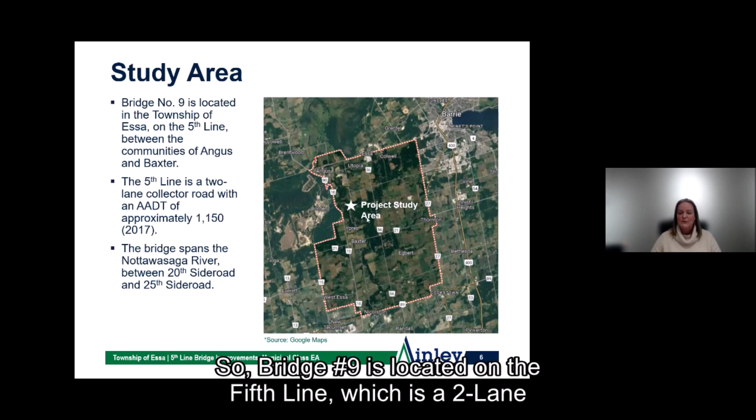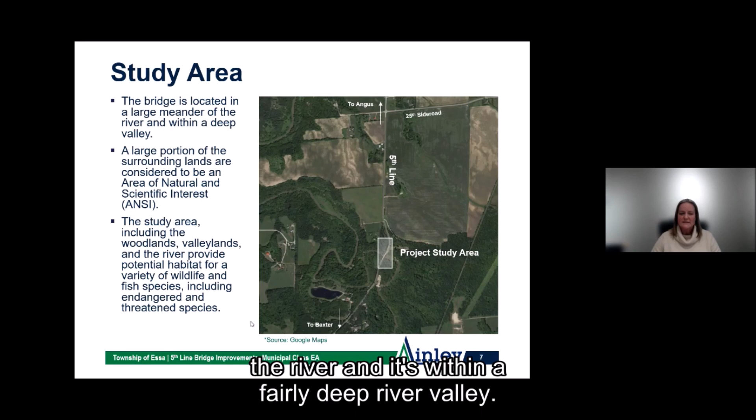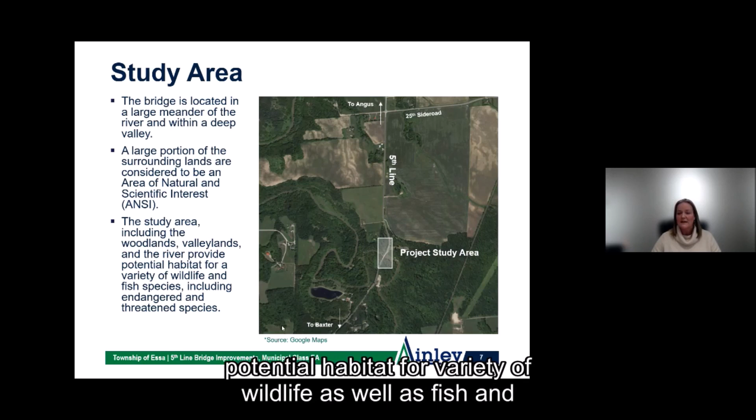Bridge number 9 is located on the 5th line, which is a 2-lane collector road. The bridge spans the Nottawasaga River between the 20th and 25th side roads. The bridge itself is located where there's a large meander of the river, and it's within a fairly deep river valley. Because of this, a large portion of the surrounding lands are considered to be an area of natural and scientific interest, and the woodlands and valley lands also support potential habitat for a variety of wildlife, as well as fish and aquatic species.

The existing structure is approximately 70 years old, and it consists of 2 spans of concrete T-beams that are supported on concrete abutments and a central pier. It also has a concrete deck and a concrete wearing surface.

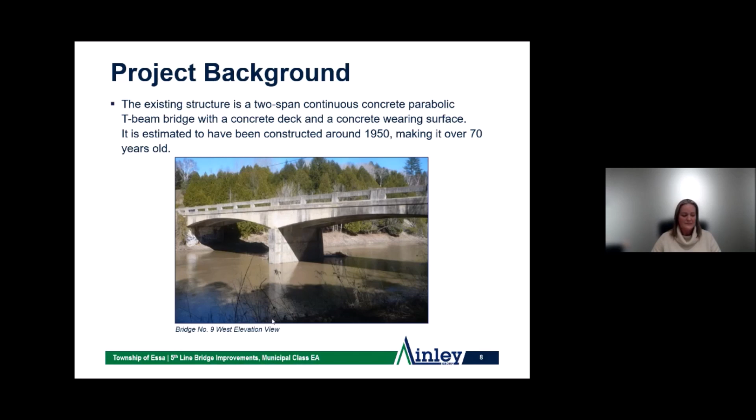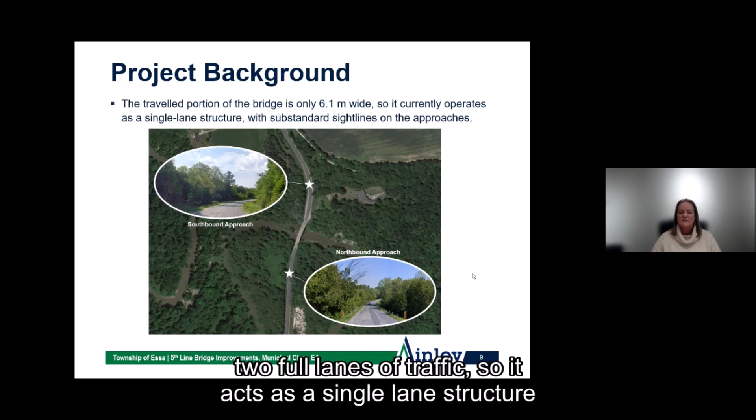The traveled portion, or the width of the traveled portion of the road that is across the structure, is only 6.1 meters wide. So that means that it's not quite wide enough to support 2 full lanes of traffic, so it acts as a single lane structure at this point in time. The sight lines on either approach are substandard, which means that it can be sometimes difficult to see around the curves as you approach the structure.

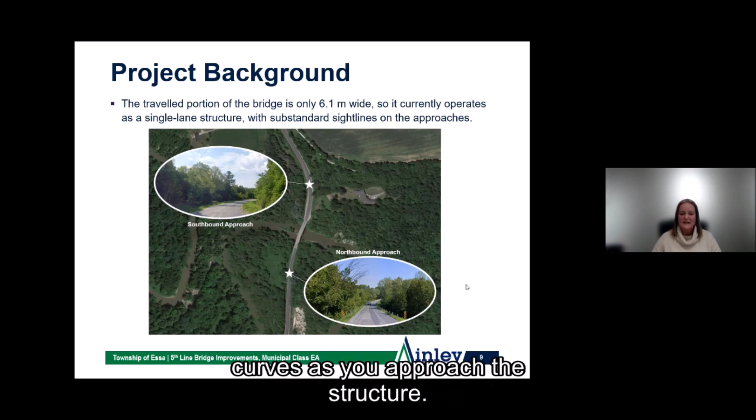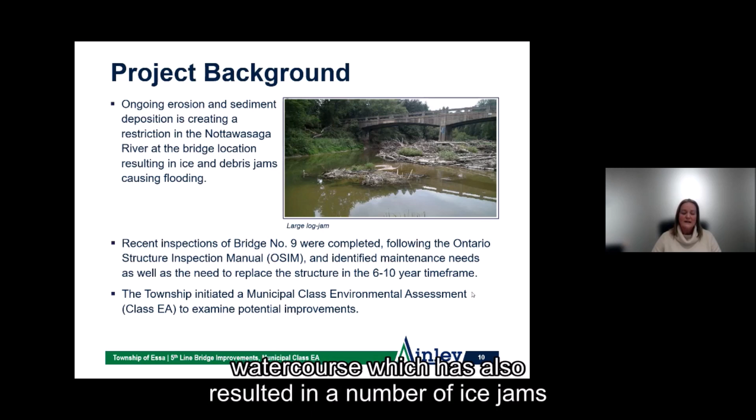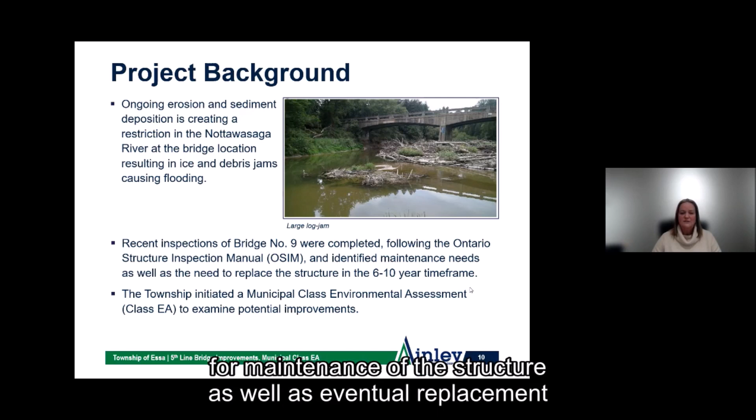There have been issues with ongoing erosion within the river valley and deposition of sediment near that central pier within the existing riverbed. This has created an island or a restriction within the watercourse, which has also resulted in a number of ice jams and log jams in recent years, as shown in the picture on this slide. Recent inspections of the bridge have also identified the need for maintenance of the structure, as well as eventual replacement of the structure within about a 6 to 10 year timeframe.

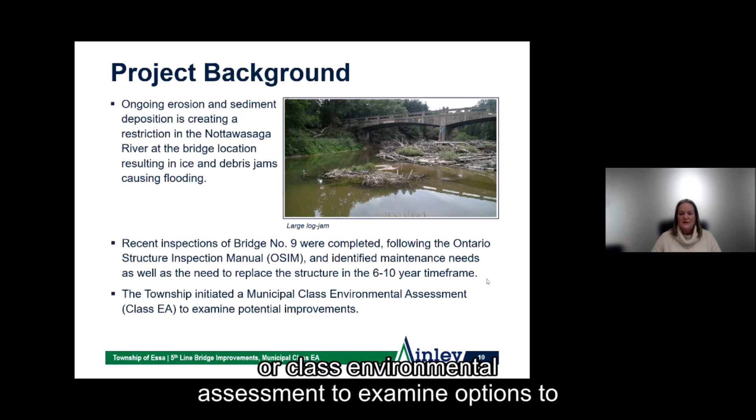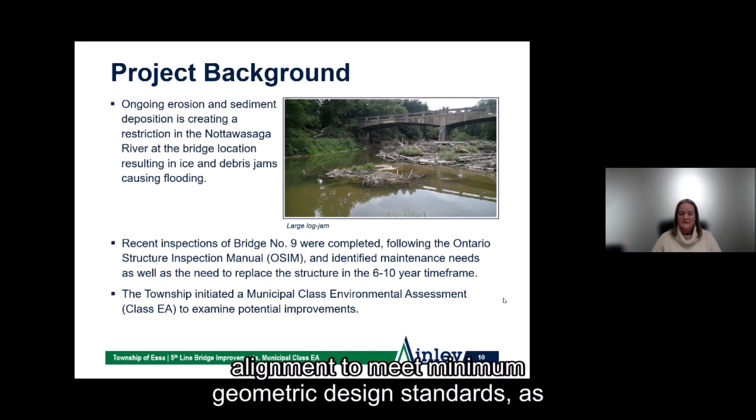As a result, the township has initiated a municipal Class EA, or Class Environmental Assessment, to examine options to address these deficiencies. And that includes accommodating a full 2 lanes of vehicular traffic, improving the horizontal and vertical alignment to meet minimum geometric design standards, as well as to address these ongoing issues related to erosion, sediment deposition, as well as these ice and debris jams that are occurring in the river.

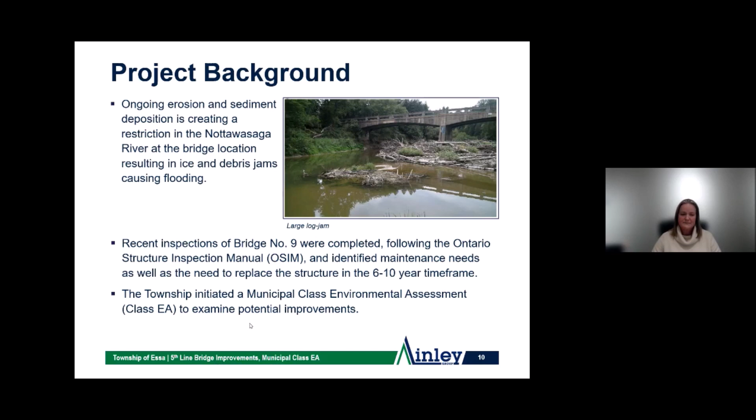In accordance with the Environmental Assessment Act, a municipality is required to conduct a municipal class environmental assessment before certain types of infrastructure projects, such as this one, can proceed to design and construction. The purpose of this is to ensure that projects consider the environment, and it's important to note that the environment is more broadly defined than one might think.

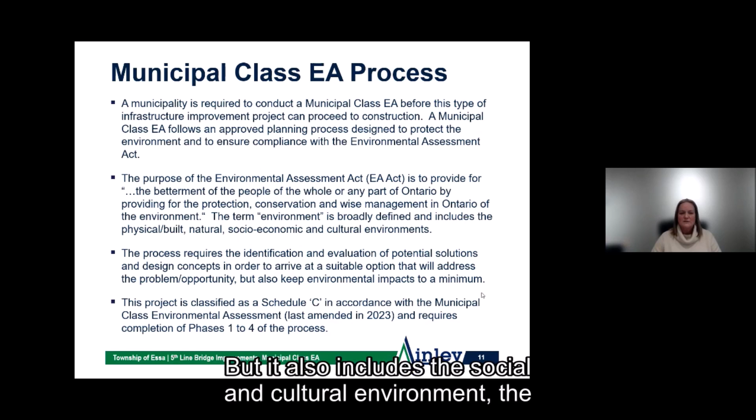So the word environment includes the natural environment, which is what we would typically consider to be plants, animals, groundwater, surface water. But it also includes the social and cultural environment, the physical or built environment, as well as the economic environment. All of these environments influence the people in the communities within the municipality, so all of these environments must be considered.

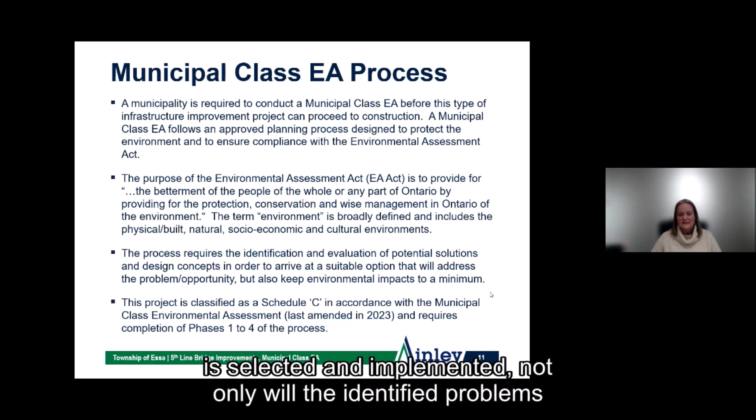The Class EA process requires the evaluation of various potential solutions and design concepts, so that once one is selected and implemented, not only will the identified problems be addressed, but the purpose is that the impacts to the various environments can also be minimized or mitigated.

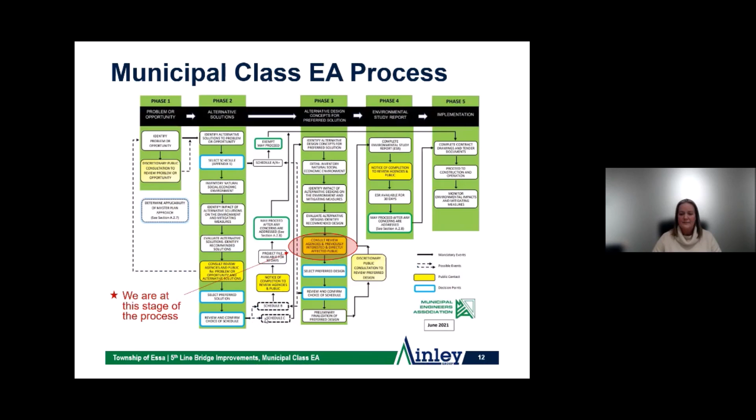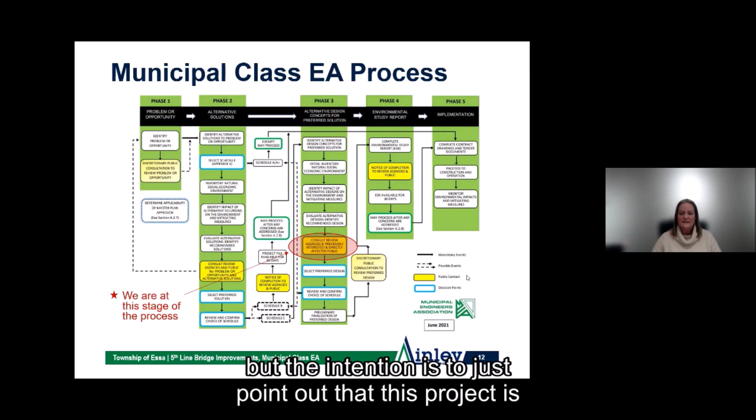This figure just provides a general overview of the Class EA process. It might be a little bit difficult to see on your screen, but the intention is to just point out that this project is following a Schedule C class environmental assessment process. And that means we have to complete phases 1 through 4 of this process.

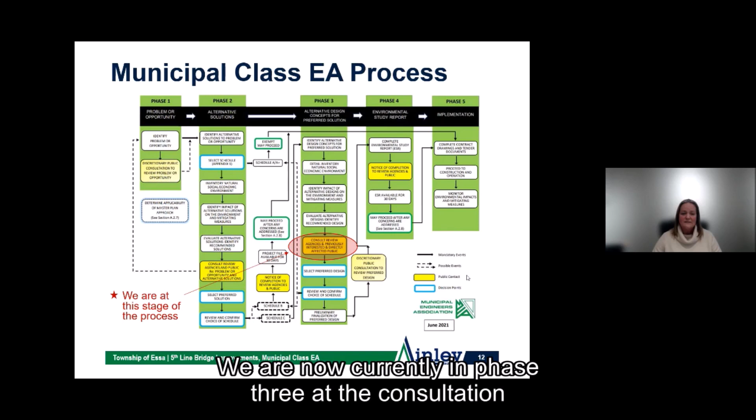You may recall when we did PIC number 1, we were back in phase 2. We are now currently in phase 3 at the consultation phase. So we are engaging and consulting again with various agencies, First Nations, stakeholders, as well as the public to obtain feedback on the work that has been completed to date.

So as I mentioned, there was a PIC number 1 previously held during phase 2 of the process, and that was back in late 2021. At that time, we had considered several alternative solutions to address the problem, and those were more broad solutions and included option 1, which was do nothing.

And that option really only gets considered because it provides a baseline upon which to assess the other alternative solutions. But because it doesn't really address the problem statement that has been developed or the reason why the Class EA was initiated, it's not typically considered to be a viable solution.

At that point in time, we also considered the alternative of rehabilitating the existing bridge structure, replacing it in its current location to accommodate the 2 lanes of traffic, and replacing the bridge but on a new alignment further to the west. And after the evaluation was completed in phase 2, we held the PIC and had consultation with various stakeholders. Option 3, the option of replacing the bridge structure in its current location, was selected as the preferred solution.

So since then, the team has undertaken additional studies and we've completed additional design work to develop these alternative design concepts for how this preferred solution could be implemented. So in doing so, the first thing we had to look at was the horizontal alignment. And in order to keep the structure generally within the same location as it currently is, there was really only one option for a horizontal alignment. So all of the concepts that you're going to see moving forward will have that one consistent horizontal alignment.

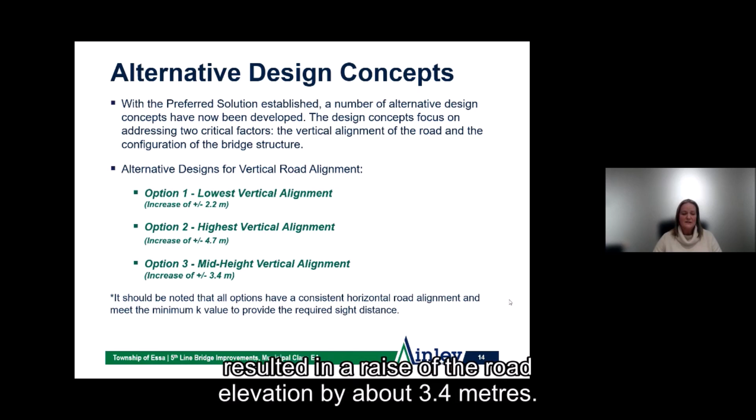The second option we considered, we called the highest vertical alignment option. So conversely, we looked at an option that would raise the elevation of the road fairly significantly to try to smooth out or reduce the valley that you have to traverse through this area. Under this option, it would require a grade raise of about 4.7 meters. And then the last option, or option 3 that we looked at, was essentially the average between the two. So we called it a mid-height vertical alignment option, resulting in a raise of the road elevation by about 3.4 meters.

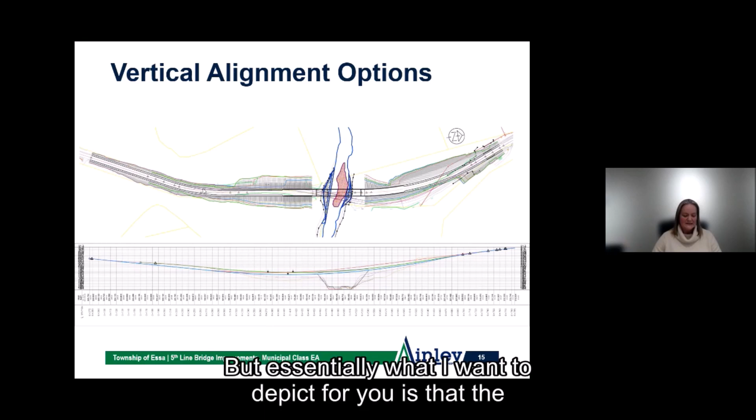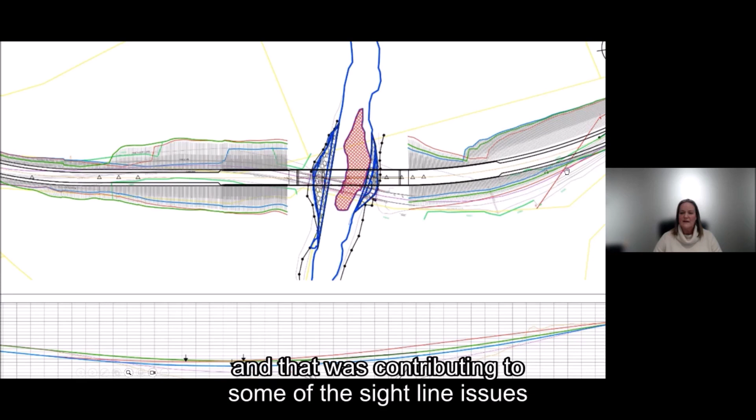The original road alignment, if you can kind of see it here, had quite an S-bend, and that was contributing to some of the sightline issues out there. The horizontal alignment that we selected, as I mentioned earlier, essentially smooths that alignment out and squares up the bridge to be more in line with the approaches on either side.

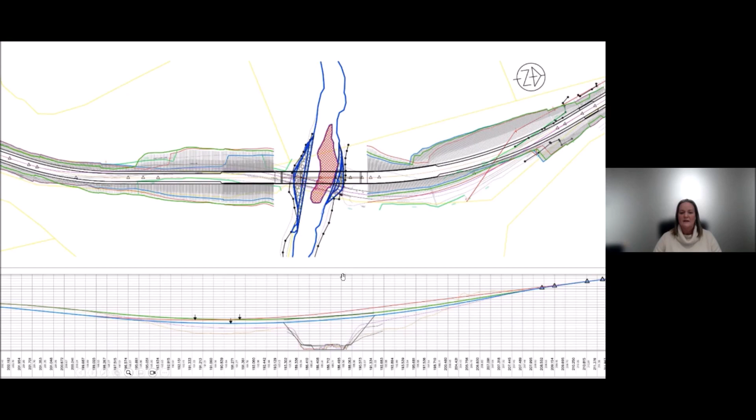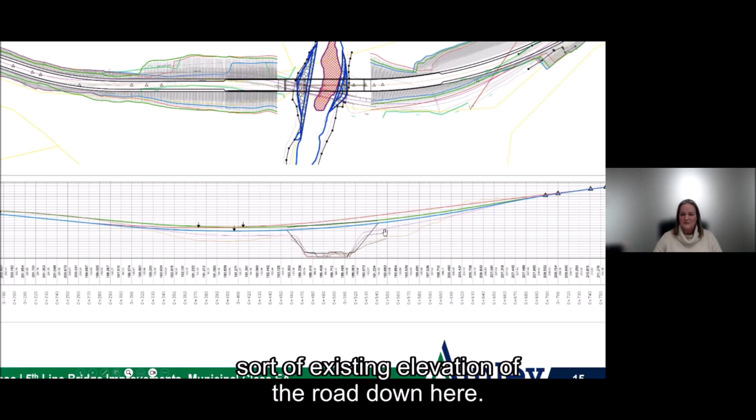Down here you can see the three vertical alignment options. I apologize, it may be hard to see, but we have the existing elevation of the road down here, and blue represents the lowest vertical alignment for option 1. Red represents the highest vertical alignment option, option 2, with green being the option in the middle.

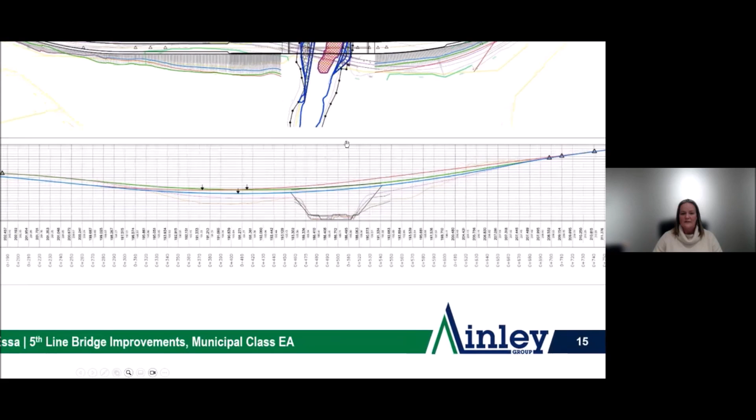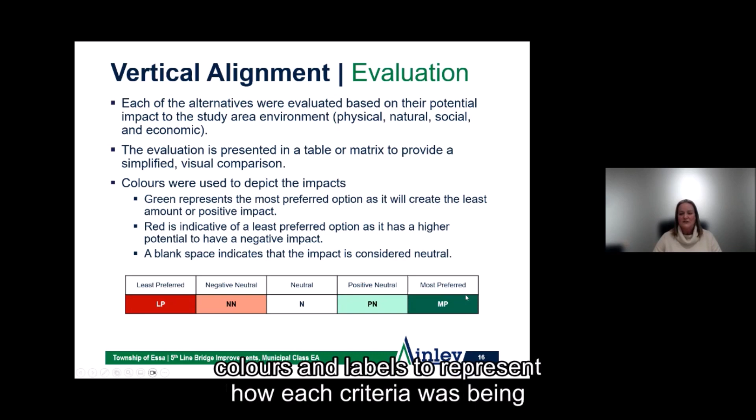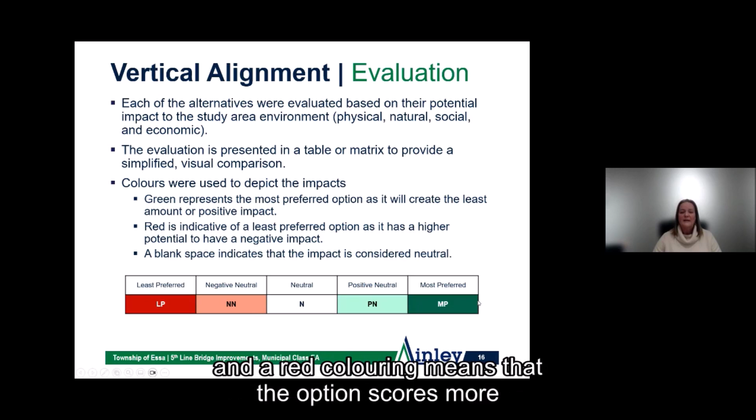Once we established the vertical alignment options, the team has to go through an evaluation process to evaluate the options based on their potential impact to the various environments. We decided to use an evaluation matrix with colors and labels to represent how each criteria was being scored. A green coloring means the option scores well or is more preferred for that criteria. A red coloring means the option scores more negatively. If an option is scored white or left blank, it essentially means the score is neutral.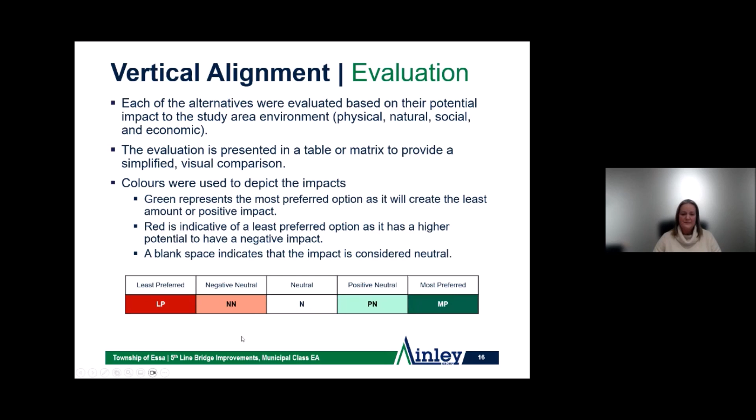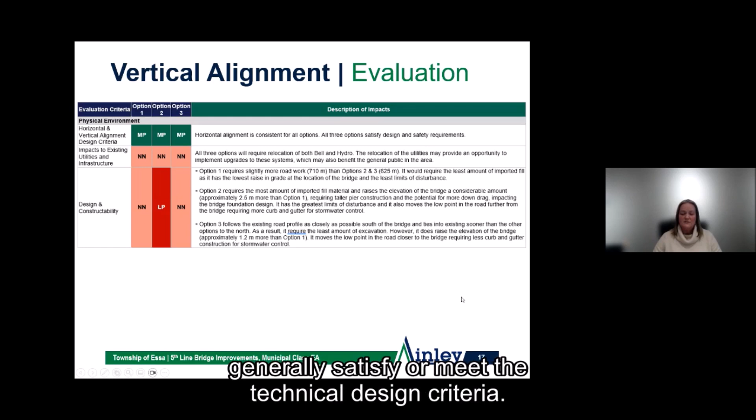For the three vertical alignment options, we started with an evaluation of the physical or built environment. Keeping in mind that option 1 is the lowest alignment option, option 2 is the highest, and option 3 is the middle: for the physical or built environment, all three options generally satisfy the technical design criteria, so they all score well in that category. Similarly, all three options will have impacts to existing utilities, so they all scored somewhat negatively.

However, when it comes to design and constructability, options 1 and 3 score better than option 2, mainly because option 2 has the largest raise in road elevation. It will require the largest amount of imported fill, the largest limits of disturbance, and may present additional potential geotechnical challenges due to the height.

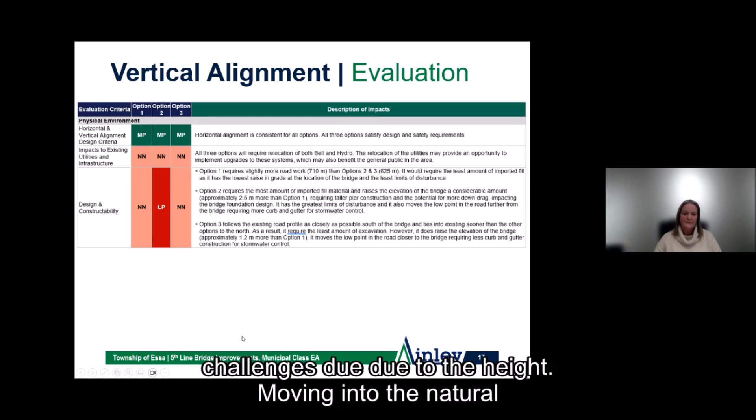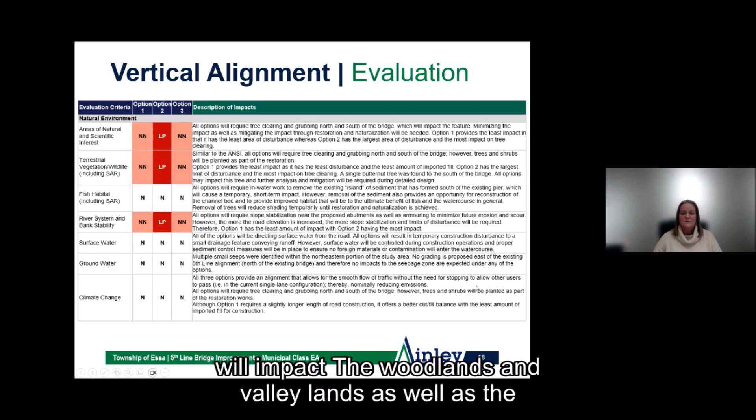Moving into the natural environment, all options will require tree removal to the north and south of the bridge, which will impact the woodlands and valley lands, as well as potential wildlife habitat in that area. Minimizing tree cutting is certainly preferred, which is why options 1 and 3 score slightly better than option 2, because they will have less limit of disturbance.

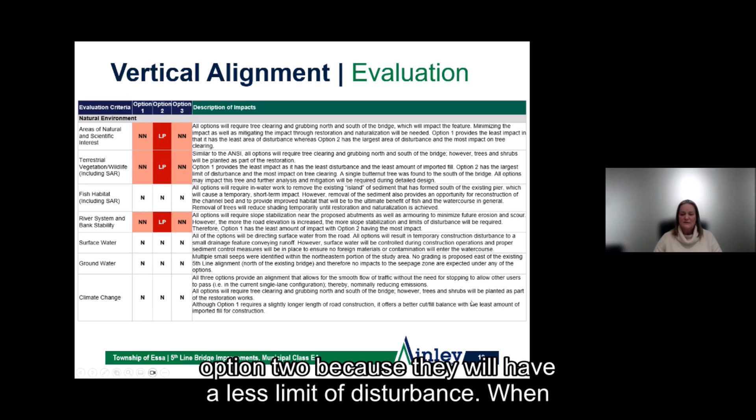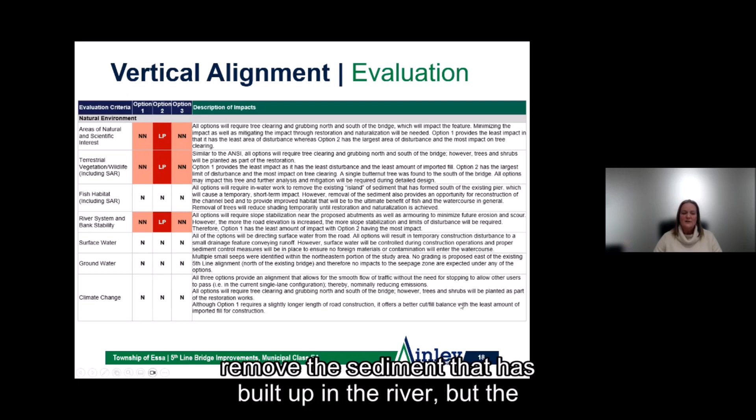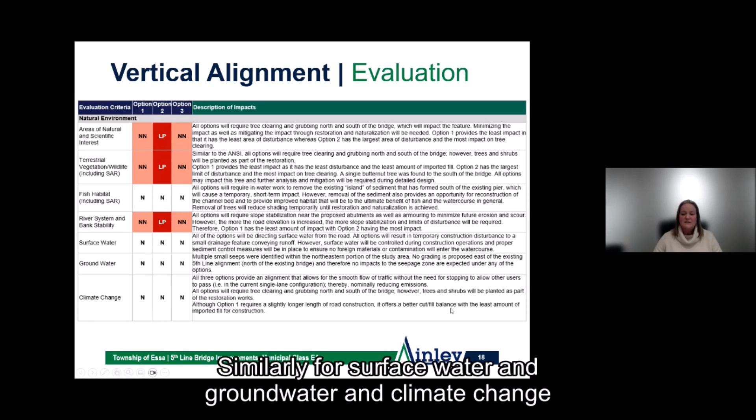When it comes to fish or aquatic habitat, all options will require some in-water work to remove sediment built up in the river, but the evaluation of vertical alignment in terms of aquatic species and habitat doesn't really come into play. Similarly, for surface water, groundwater, and climate change considerations, all of these vertical alignment options generally score about the same.

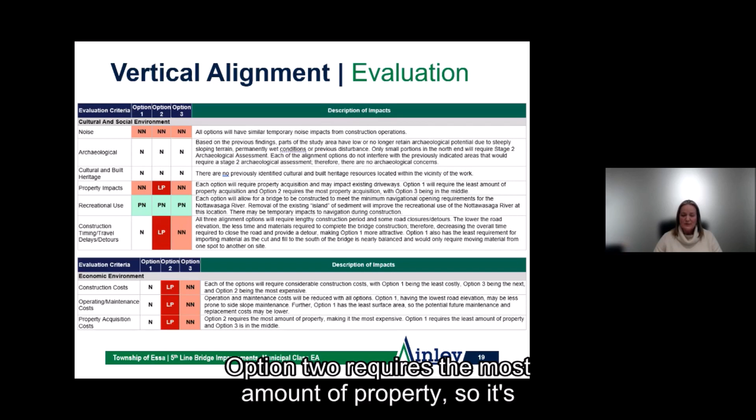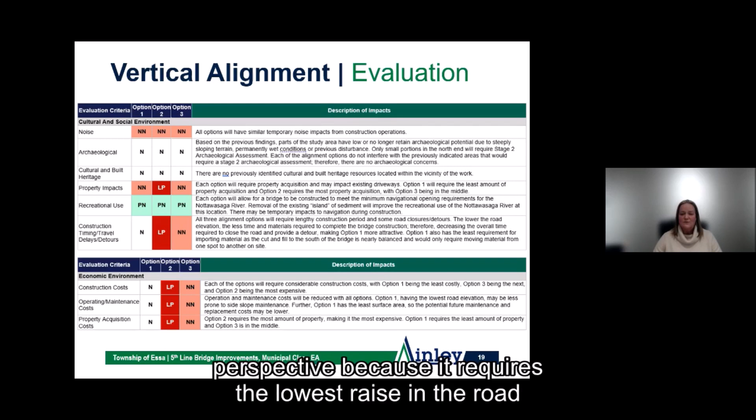For the cultural and social environment, the main difference is that option 1, requiring the least amount of property, is more preferred. Option 2 requires the most amount of property, so it's least preferred, with option 3 in the middle. Option 1 is also preferred from a construction timing perspective, because it requires the lowest raise in road elevation, it's anticipated to take slightly less time to construct.

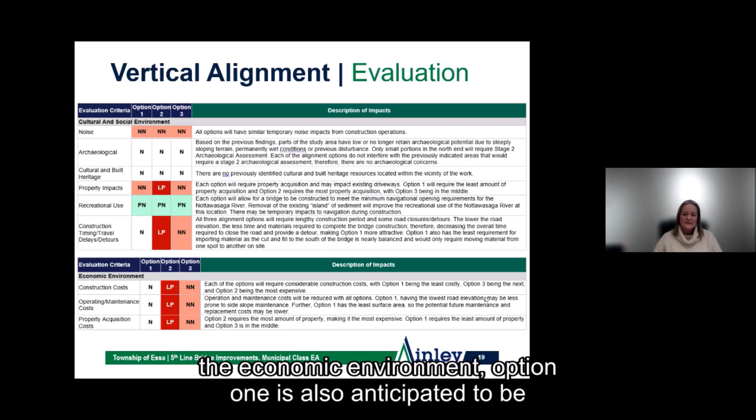In terms of the cost between the three, when we get into the economic environment, option 1 is also anticipated to be the least expensive, again with option 2 being the highest and option 3 being in the middle.

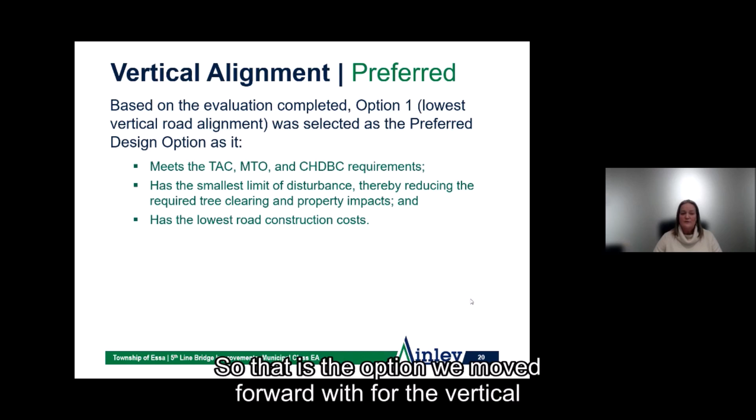Based on the evaluation completed for these 3 vertical alignment options, the team has selected option 1, the option with the lowest vertical alignment, as the preferred design option. This is because it still meets all of the technical design criteria and standards, has the smallest limit of disturbance, and the lowest road construction cost. So that is the option we moved forward with for the vertical alignment.

Now that we've had the horizontal alignment and vertical alignment evaluated and considered, we moved into alternative design concepts for the structure configuration itself. These 3 options that were developed included a single span structure, a 2-span structure, and a 3-span structure.

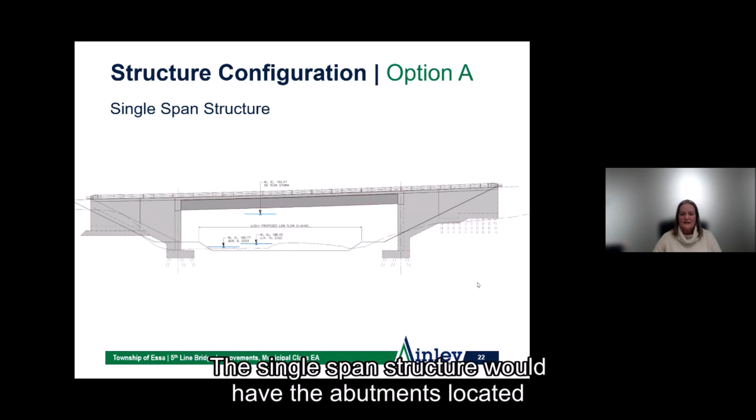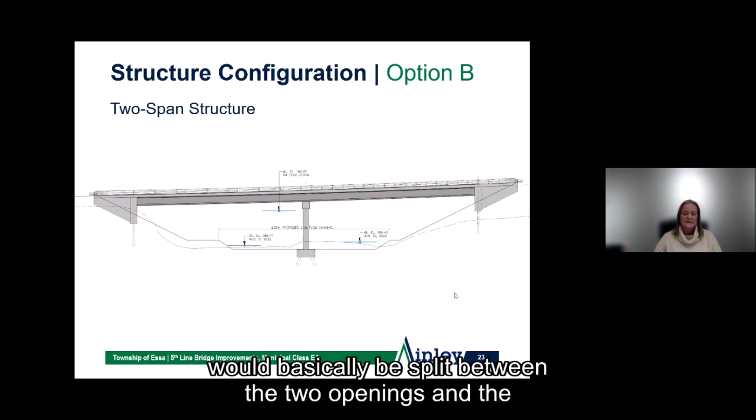As illustrated here, the single span structure would have the abutments located outside of the normal channel width, so the channel or watercourse would be conveyed through the main opening. Versus the 2-span structure option, which is essentially putting back the same configuration as what is there now, with a central pier in the riverbed splitting the water between the 2 openings, and the abutments set further back on the slope.

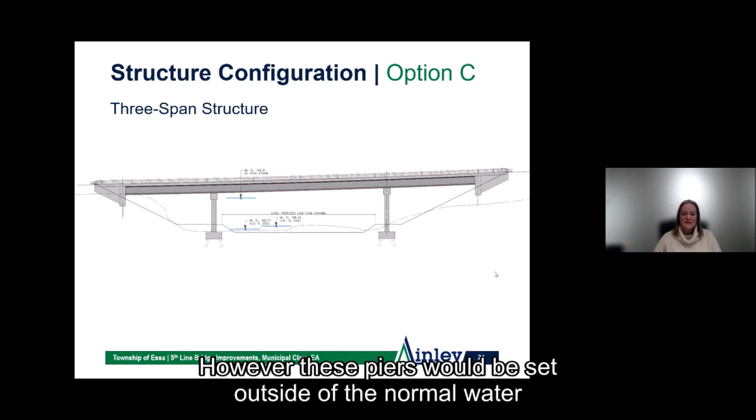Then we have option C, which would be a 3-span option with 2 piers. However, these piers would be set outside of the normal water level, so the main river channel and flow would be directed through one single middle span, and the outside spans would only be used to convey flows during larger rainfall events or spring thaws. The abutments are once again set much further back on the slope.

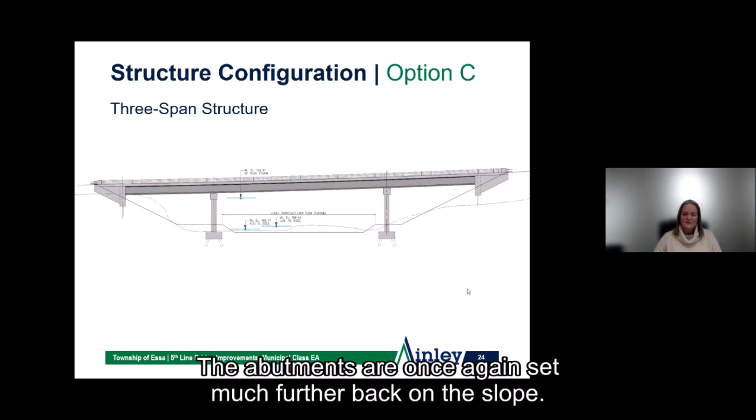Once again, with these design options, the team had to go through the same evaluation process to score each option and evaluate the various criteria and potential impacts on the environment. This time, to make it easier, any criteria that were not applicable or were considered neutral were not included in the matrix.

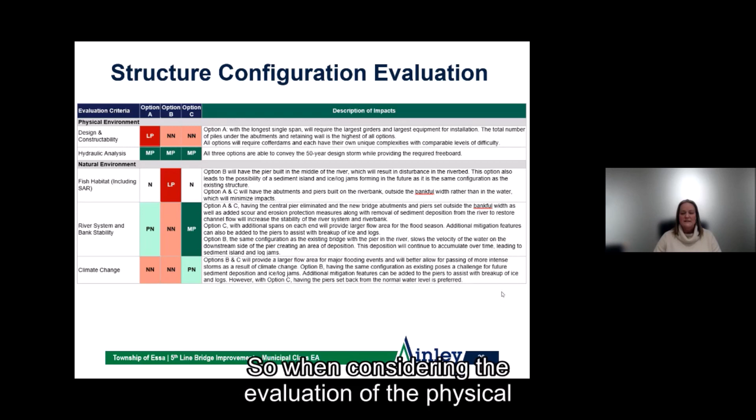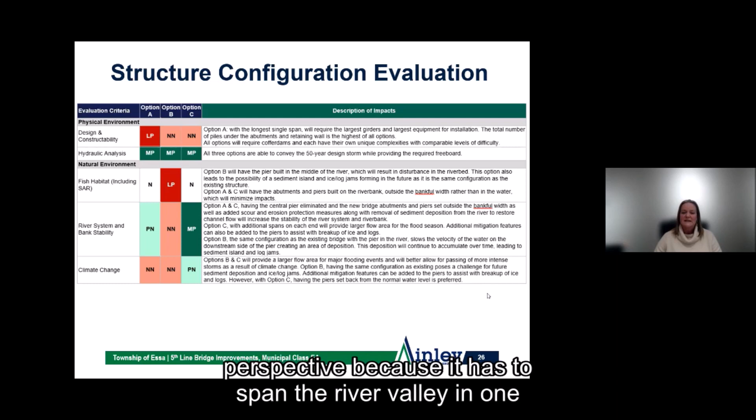When considering the evaluation of the physical environment, option A, the single span option, scored the lowest because it has to span the river valley in one length, meaning it requires the largest girders, the most piles, and the largest equipment for installation.

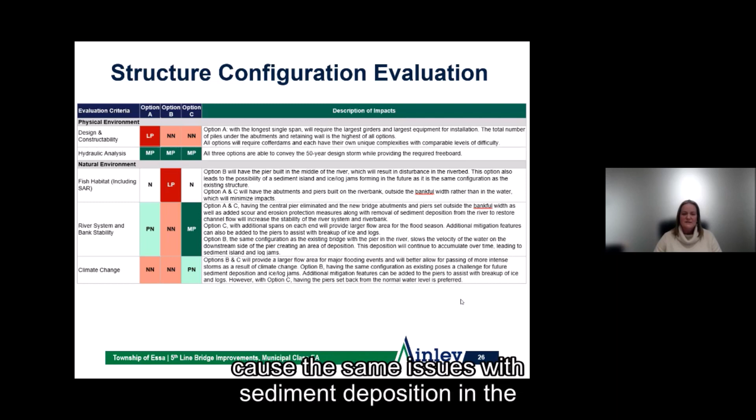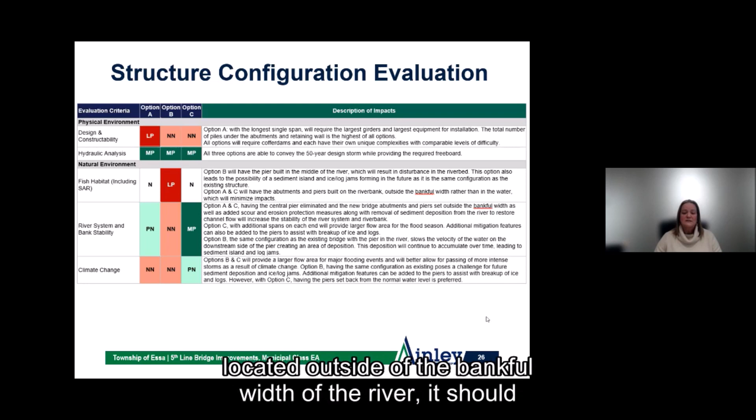From the natural environment evaluation perspective, option B, with the central pier similar to what is there now, raises concerns that it may continue to cause the same issues with sediment deposition and potential for ice and debris jams in the river, so it scored a little lower. With options A and C, since the abutments and piers are located outside of the bankful width of the river, it should minimize those impacts and provide for better river and bank stability.

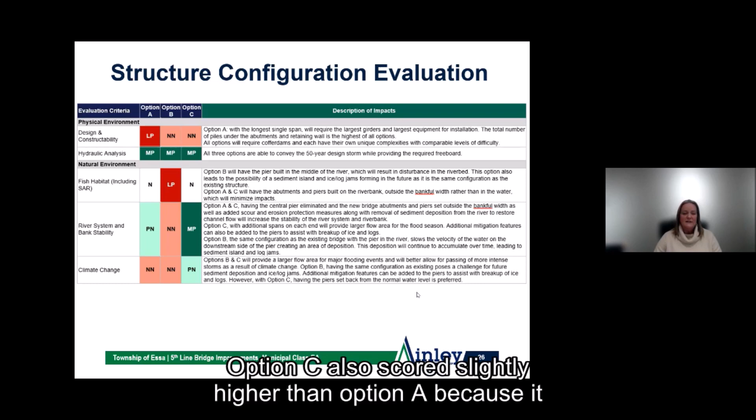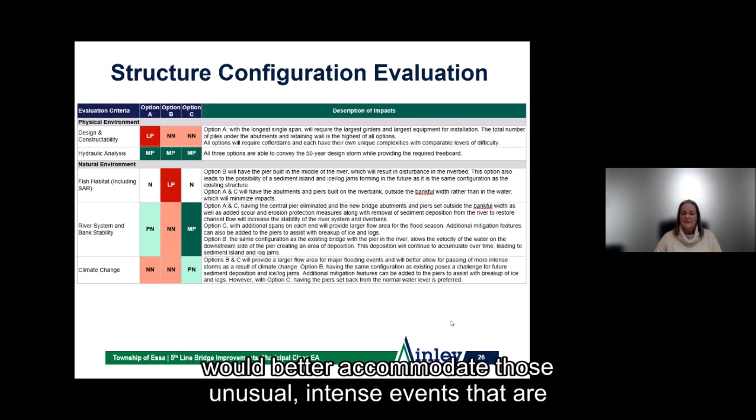Option C also scored slightly higher than option A because it provides a larger flow area for the flooding season and would better accommodate those unusual intense events that are becoming more common with climate change.

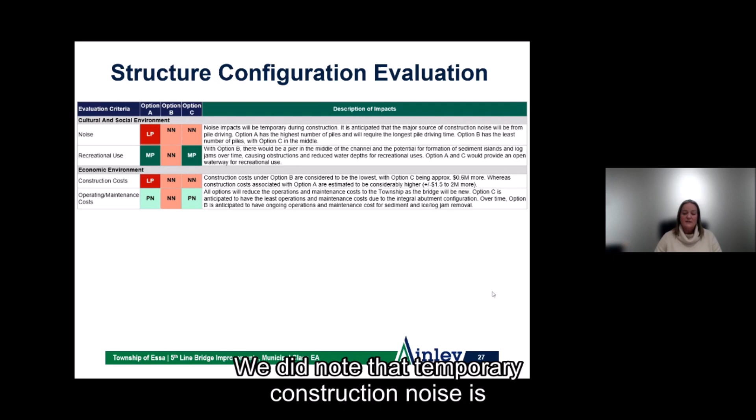For the cultural and social environment, temporary construction noise is anticipated for all options, but option A scored slightly lower as it will have more piles, which can be a significant source of noise during construction. From a navigation perspective, both options A and C would be preferred because the watercourse would be conveyed through one main opening with no pier located in the middle.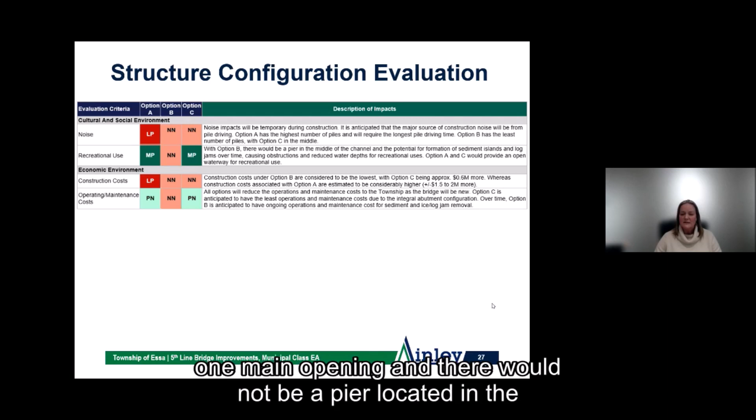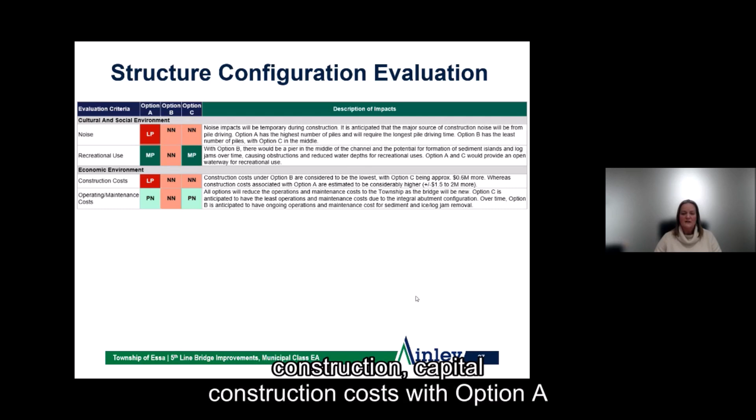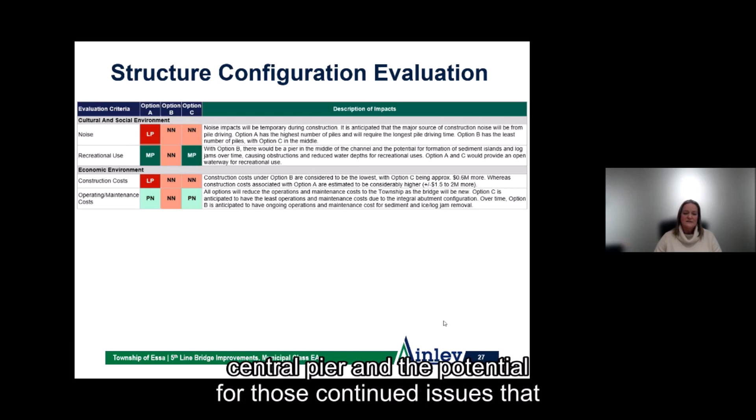Finally, regarding the economic environment, options B and C have fairly similar capital construction costs, with option A being the most expensive. From an ongoing maintenance and operations view, option B would be least preferred, again due to the central pier and the potential for continued issues requiring township forces to go out and address them.

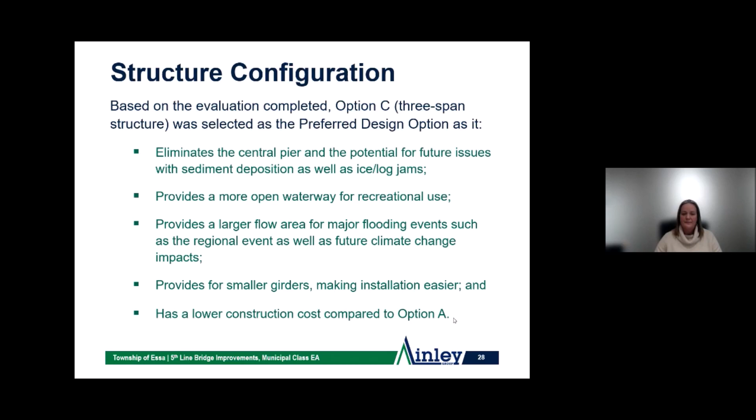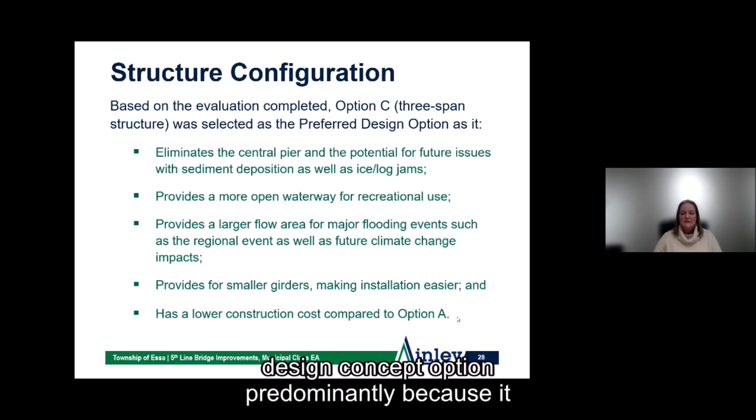Based on the evaluation, the team selected option C, the 3-span configuration, as the preferred design concept, predominantly because it eliminates the central pier and provides for a more open waterway. It provides more flow area for flooding and has a lower capital construction cost compared to option A.

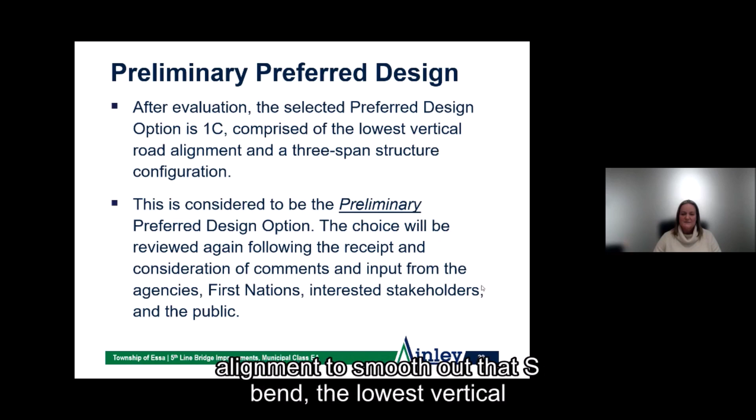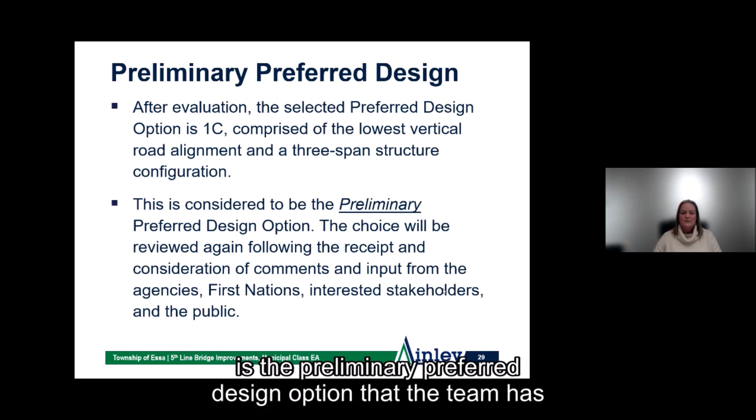Pulling all of that information together, the team has selected what we've called design concept option 1C as the preferred design. This includes the combination of the revised horizontal alignment to smooth out the S-bend, the lowest vertical alignment, and a 3-span bridge structure. It's important to note that this is the preliminary preferred design option that the team has selected.

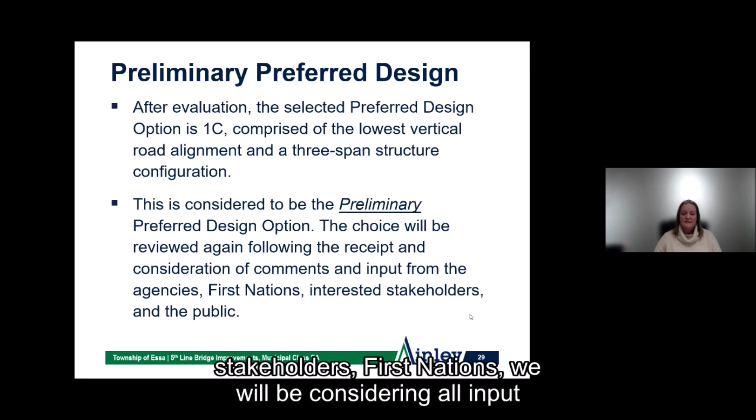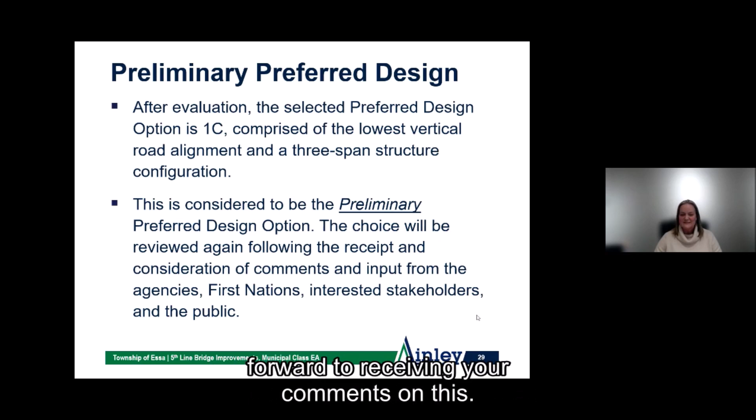However, as we engage with yourselves, review agencies, stakeholders, and First Nations, we will be considering all input and comments, and then we'll reevaluate based on the feedback received to determine if this is the final selection. So please remember that your input is important, and we look forward to receiving your comments on this.

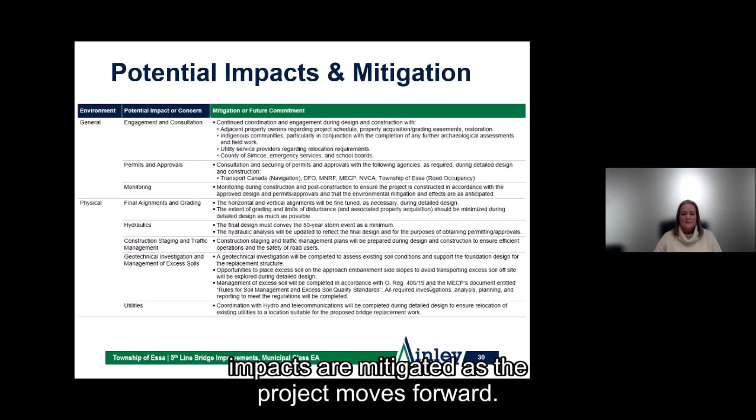In selecting the preferred design, we also need to consider and document as part of the Class EA process any commitments to future work that are required to ensure that any potential impacts are mitigated as the project moves forward. So we've included a couple of tables in this presentation to demonstrate that we have listed items, for example, as the design and construction proceeds, that engagement will still be necessary.

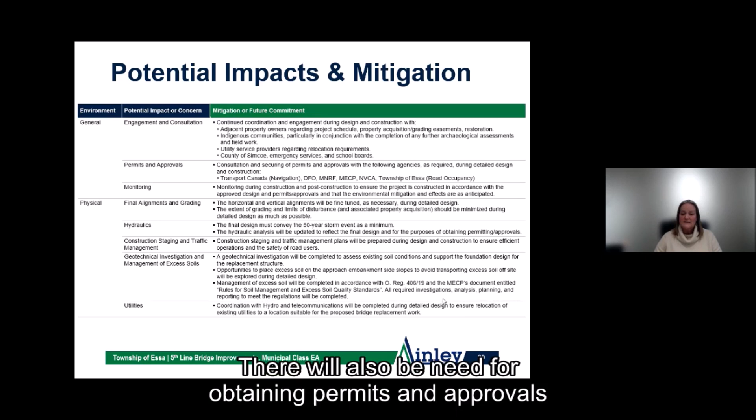There will need to be continued coordination with regards to property acquisition, utility relocations, emergency services, traffic management and that type of thing. There will also be need for obtaining permits and approvals as we move forward through the process. The design will have to be refined to try to minimize impacts as much as possible. So that is reflected in this table.

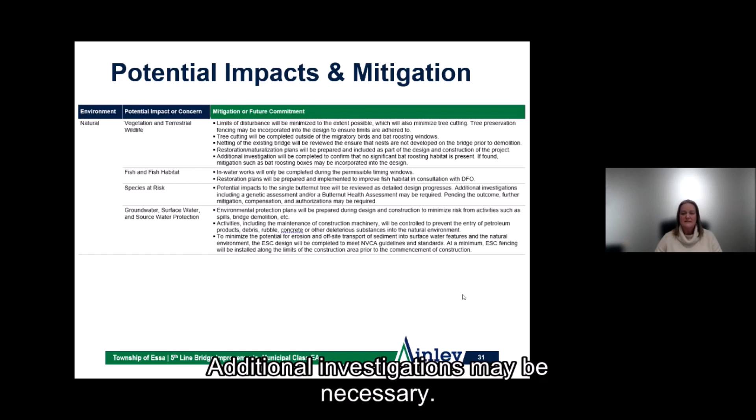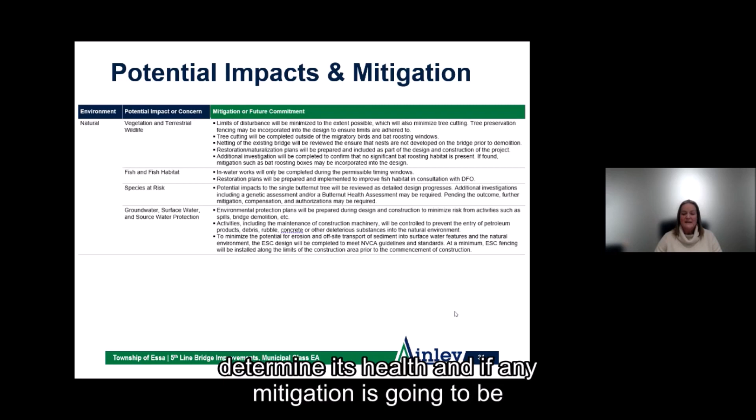And then under the natural environment, we've also noted that various construction timing restrictions will apply. Things like restoration plans will need to be prepared. Additional investigations may be necessary. For example, during the environmental field work that was completed, there was a single butternut tree that was discovered, and further assessment will be required to determine its health and if any mitigation is going to be required. So there are additional works that will need to be completed, and this will sort of act as a checklist to guide the process moving forward.

Similarly, we've noted additional requirements for work such as archaeological assessments, noise and vibration monitoring, the importance of minimizing the economic impact of the project, because we understand that certainly the economics has an impact on the township and its tax base. So again, moving forward, this will act as a checklist for commitments to future work, and you're welcome to view this in more detail once the materials become available, and it will also be in the final Class EA report as well.

We're nearing the end of the formal presentation part of this evening's event. I just want to note a couple of next steps before we get into the comment period. So as previously mentioned, a recording of this presentation will be made available on the Township's website. We would appreciate receiving any comments or input you might have before the end of the year. Then the team will consider all of these comments and any feedback that has been provided to determine if the preferred design choice will remain the same, or if we need to go back and relook at anything that may not have been considered or apparent in the previous evaluation.

Once that's completed and the final preferred design choice has been selected, then we will issue a notice of completion, and that will be followed by a final 30-day comment period. So this won't be the last time you'll be able to provide input either. You will have an opportunity during that last 30-day public review period. At the conclusion of that comment period, however, assuming there's no objections, then the Class EA will be considered complete, and that will allow the township to then determine if, how, and when they want to proceed.

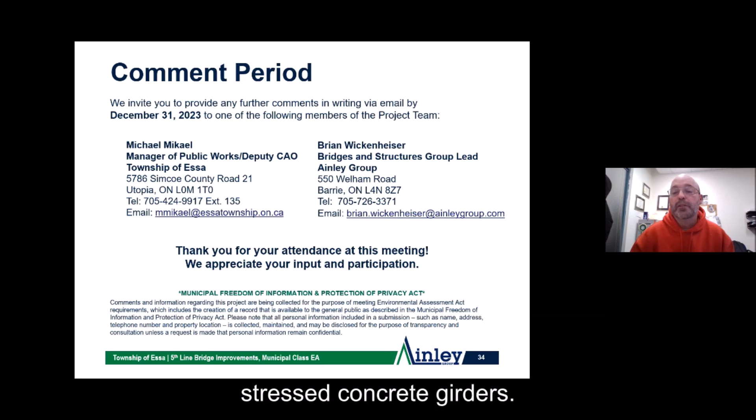Next question, is a concrete girder bridge the only type of bridge being considered at this point? Not necessarily. The configurations depicted were based on pre-stressed concrete girders. That doesn't mean that it would have to stay with that. During the preliminary design, options would be looked at with regards to potentially using steel girders. Typically, we have found, though, that for this type of configuration, concrete girders are just as economical as the steel girders.

And also, given the potential for concrete girders to be locally sourced, that is also a potential desirable impact to the local economy to utilize potentially locally produced girders. But the type of girder is not finalized at this point, and it will be reviewed and considered during the design stage.

Next question: will the homeowner affected be notified of the new land alignments? Yes, any property impacts will be brought to the property owner's attention as soon as possible during the preliminary design, and once the actual impacts are finalized. Once the alignment is finalized and the property impacts are determined, a property acquisition will be initialized. At that point, the property owners will definitely be advised, but I imagine there will be some consultation with the potentially impacted property owners leading up to it also.

There will be efforts made to minimize property impacts as much as possible, while also taking into account, though, the economics of doing so. But that was one of the goals, even with the alignments we looked at, was to minimize property impacts as much as possible. I should also mention, when Tammy was talking about the various vertical alignments, not only was it driven by costs and some of the other factors, but one of the big factors was property impacts.